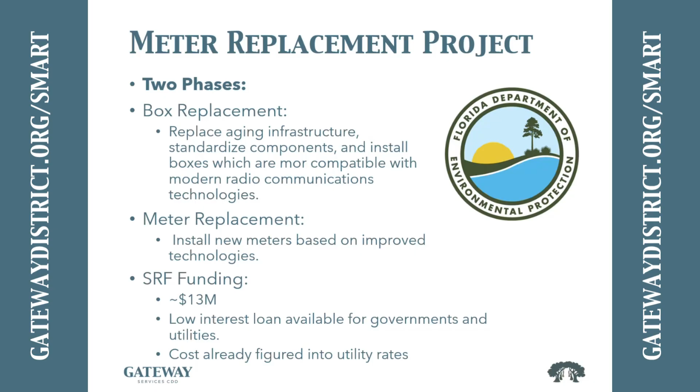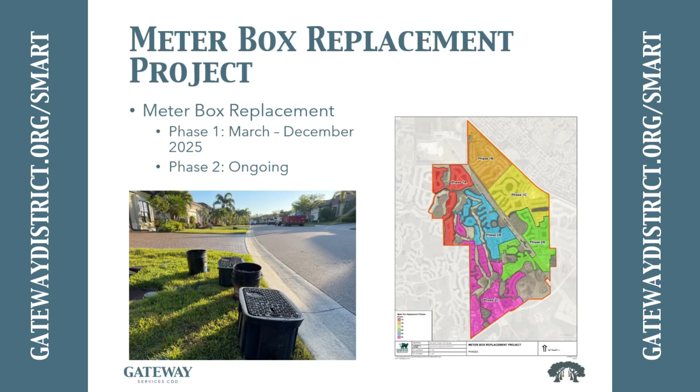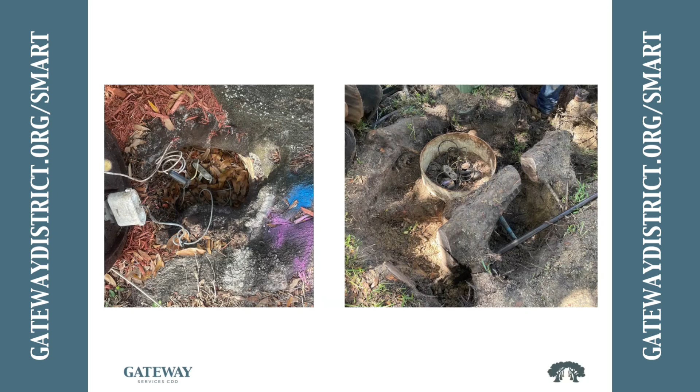And from the customer's perspective, the cost for this has already been figured into our utility rates. So in effect, you guys are already paying for it. You won't see any additional increases once this project's completed on top of what we're already charging. So just to go over where we've come from, the box replacement phase one started in March and ended in December of 2025. Phase two is ongoing, and I think the next few slides are some greatest hits of what we ran into, just because there's some shocking stuff out there: roots, trees, and more roots. Next slide.

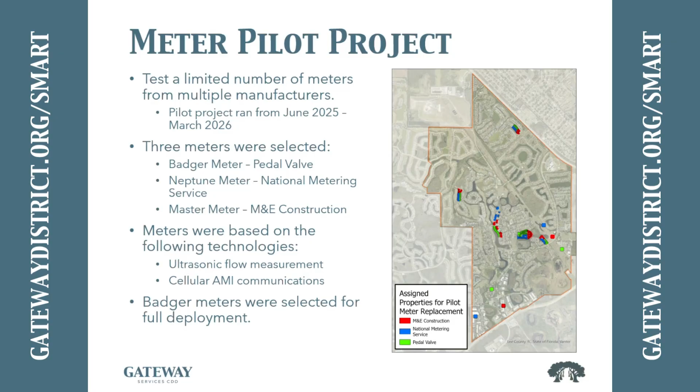So in preparation for awarding this contract to PVI, we held a bit of a contest to try to figure out which system we wanted to go with. So that was what the meter pilot project was. That ran from June 2025 and concluded in March 2026. As part of that, we tested multiple different meters from multiple different manufacturers listed on there: Badger, Neptune, and Master Meter. Based on price and overall system performance, we recommended that we award it to Badger Meter and Pedal Valve for the full deployment.

And in comparison to what we currently have, currently we have a Zenner system based off of what they call multi-jet and turbine meters, which communicate on a fixed radio network on an unlicensed radio frequency. So this is a less than advantageous system to use, because this system communicates on an unlicensed radio frequency, and basically everything else does. Your garage clickers communicate on that. You have various types of radio. You can even get interference from power lines and radar stations, I believe, also. And then the Zenner multi-jet meters, they're mechanical, they degrade over time.

So in response to identifying those issues, we're going with a newer system based on very modern technology. The Badger E-Series meters, got a picture of one up there. That's pretty representative of what will be installed in the box in front of your house. It's an ultrasonic meter. Basically, it uses sound waves to measure the velocity of water flowing through the meter. They are very accurate, and the accuracy doesn't tend to degrade over time because there's no moving parts in it.

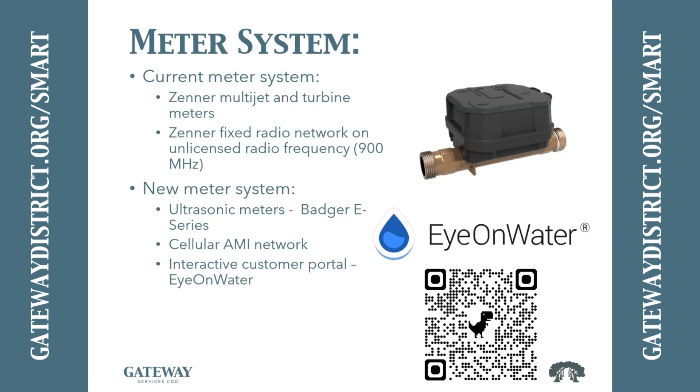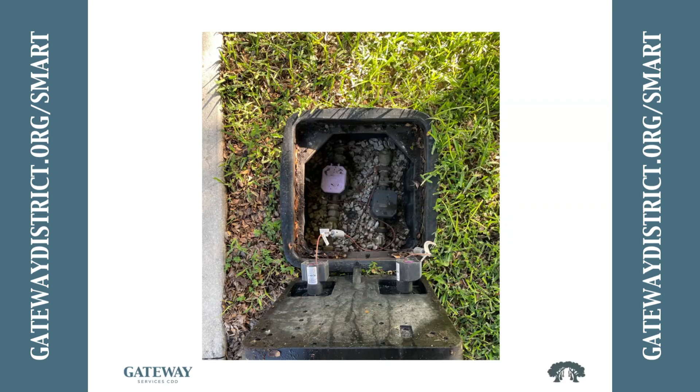So if you want to take a second and just note that or download the app, like I said, we'll push that information out more later down the road. Those are fairly sensitive, so even if you have a relatively slow leak when you're out of town, it should be able to detect it. I just want to give kind of a picture of what the end product will look like with the meters in the box.

So one of the beauties, and Tom, you'll appreciate this, I know in your community, is our existing system. We've got a bunch of components on light poles throughout the district. Those are coming down. All of the communications of this is within this meter, within this endpoint. So that's going to be less infrastructure we have to maintain and less exposure risk out there. All of this is housed in the meter, in the pits. So that is a huge added perk for us.

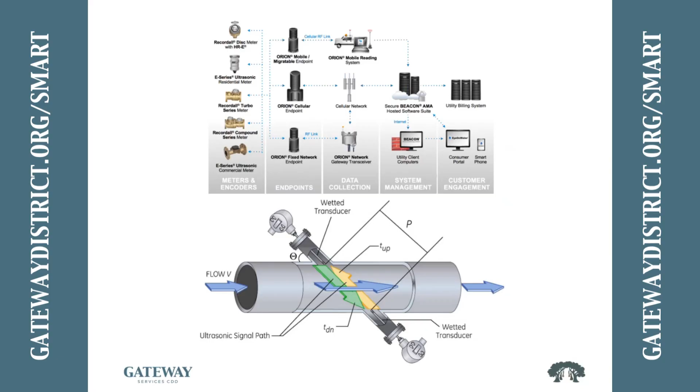It communicates directly with the cell towers; there's no reliance on, like Chelsea said, repeaters to bounce all the signals around the communities. So all that stuff on the light poles is going away at the end of this. And then expected improvements. So this whole system we're going to is operating on what they call a network as a service model. The vendor sets up all the infrastructure, and then they supply access to that infrastructure to their customers, meaning the district, as a service for a fee.

The flip side of that is the AMI vendor is responsible for maintaining all of that. They're responsible for ensuring that our equipment is communicating with their servers. We're not responsible for maintaining that communication infrastructure, so we're moving away from a lot of what's given us issues in the past, which is communication infrastructure failing after a lightning storm or batteries on these repeaters running out, all that sort of thing.

The ultrasonic meters themselves have no moving parts. They don't degrade in accuracy over time because the measurement isn't relying on any moving parts, which would lead to more accurate billing and also improved leak detection capabilities. And I want to emphasize, if you all remember, we came in and for the most part around your meter boxes, we cleared the area, and we have a new rule in place that the board adopted.

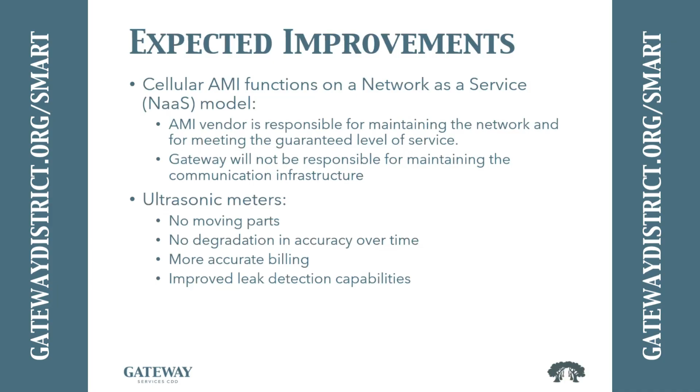In terms of how we're going to be going about this meter replacement project, we're basically planning on going through it in the same order that we did with the box replacement. So, Pelican, you're first. We're anticipating that this project will start the week of June 1st. Like they said, it'll be a bit slow for the first week or so as the team gets situated, but once they get into full swing, it's gonna go pretty quickly.

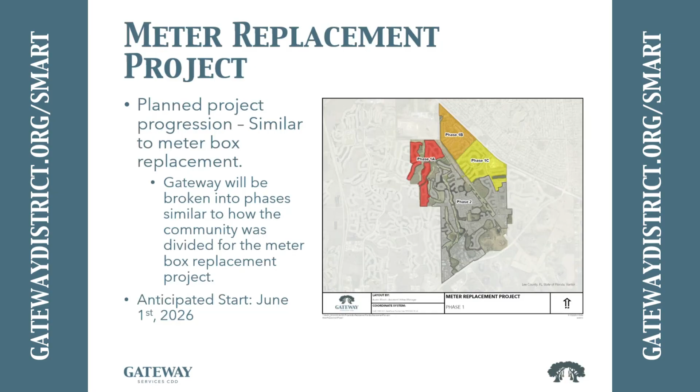Right behind Pelican, we've got Arborwood Phase 3. We've got coming to you, Tom, over there in Villages of Stony Brook, and then moving over towards Hampton Park. And these folks are gonna be rolling. We did a lot of the legwork, a lot of the time-consuming work in advance, which is why we started this project over a year ago.

The mailers notifying the area that meter phase 1 is going to be occurring were sent out on May 12th. Has anybody got one? It does not have a real name on it. The mailers are addressed to resident and then your address, because what we found is if we put the owner's name and it's wrong, the post office isn't going to deliver it. If you just put to the resident, the postal service is going to deliver it.

I'm repeating your comment for those online because this is recorded: when we send mailers out, especially to snowbirds, they might not get the mail, or it might not forward to their northern address, or it may be delayed. Yes, we understand that. That's why we're hosting this town hall. That's why we're going to send email communications out to all of the HOAs, asking them to forward this along, just like we did with the first part of the box project. But again, this is going to go so quick, truthfully, it's literally going to be a swap. It's good to hear that you did get the mailers and that the Postal Service is picking up pace again, because I know there were some concerns there for a while.

To your point from earlier, we contemplated door tags. We said no, we don't want door tags because we're going into out of season. From the feedback we had heard prior, we don't want that to be a sign or signal that nobody's been there for months on end. That's why we opted for the mailers, hoping it gets to the resident. But between all those other things I just mentioned, we're hoping you all can also be the messengers back to your communities too.

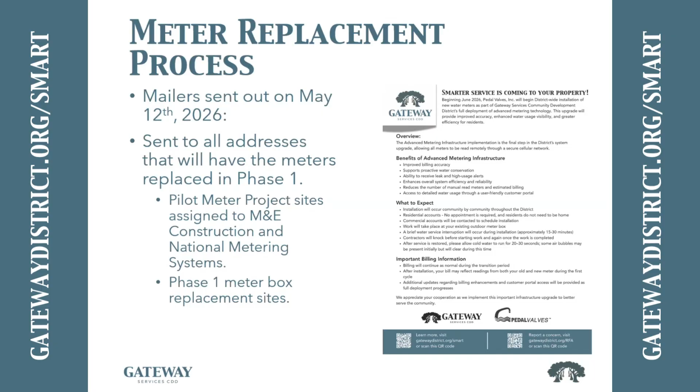The mailers were sent out to all the addresses that will have their meters replaced in phase 1, which, apart from all the phase 1 meter box replacement project locations, also includes all the pilot meter project sites that were assigned to the other 2 vendors, because we want to get those out of our system before they start charging us. Next slide.

So the replacement process, just as a heads up, expect a brief... 12 is an oddly specific time. I think I meant to type 15. 15 to 30 minutes. You're going to be timed. Yeah, I was going to ask, how'd you come up with that? I'm going to be standing over you guys with a stopwatch. Okay, you're within the range.

Service interruption during installation, just to allow the meter to be swapped out. The installer will attempt to make contact with the resident prior to the shutoff, just to ensure they're not in the middle of taking a shower. For residential accounts, the resident doesn't need to be home for the installation to occur. I believe the SOPs state that they'll be flushing after the meter's installed, to ensure that any debris that may have entered the line gets flushed out.

Commercial accounts will have the opportunity to schedule installation to minimize disruption to operations. Once the installation is completed, just run your cold water tap for, what's the recommended time, 30 seconds? Cold water, not hot. Just to ensure air is completely purged from your house's plumbing.

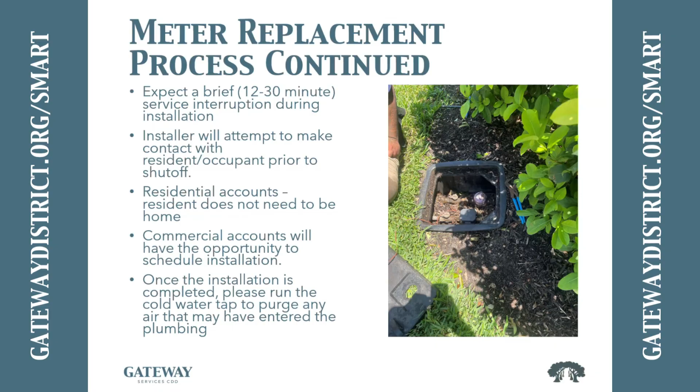That concludes everything I had. Are there any questions from the audience?

I could repeat the question for those that are online and recorded: how many vehicles are anticipated? Was it like the meter box project with the train, what we called the train? There will not be a train. Each installer will have their own vehicle. There might be one or two, but for the most part, it's one vehicle, maybe two at most, not the train. So minimal impacts as part of this.

So the question was the CAM for the HOA: if the HOA has multiple accounts, will they be able to have one EyeOnWater account and just toggle to different accounts? You can link multiple accounts on EyeOnWater. We're not sure how many, but you can link multiple accounts. Leslie just responded: as long as you have the account number and the same email address is linked to all accounts. So that'll be kind of the second half of this project.

So the question was, residents can open the lid now and see the numbers on the meter. Will they be able to do that in the future? I'm going to caveat it and say you really shouldn't be in the box. It's a digital reading, so you'll be able to see. You will still be able to see the digital. It'll just be a digital number instead of that little toggle thing.